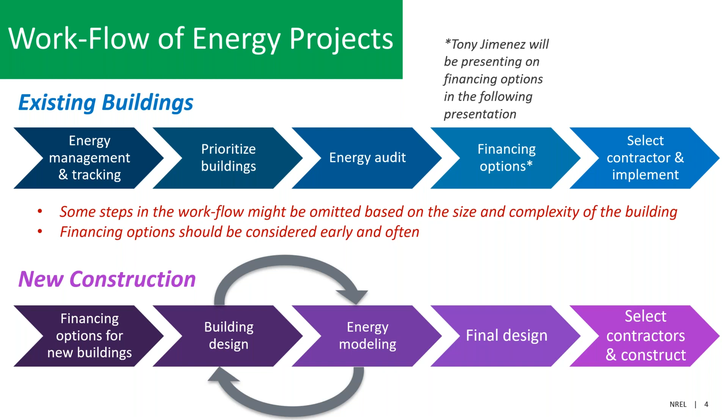So, existing building workflows. This is just the same flow diagram, but the three things I'll talk about in the upcoming slides for existing buildings for energy projects are the energy management tracking, prioritizing the buildings, and doing the energy audit. And then, as I mentioned, Tony will talk about financing options in the third section. So, next slide.

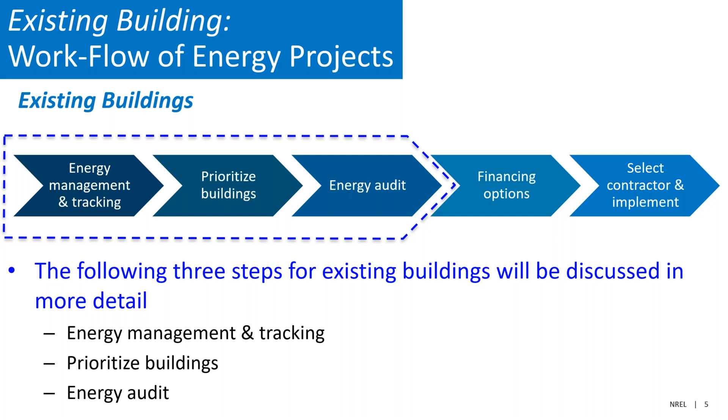So the financing option, or the energy management step. Sorry, I'm trying to get rid of the toolbar. I can't see the whole slide with GoToWebinar, but I'll just deal with it.

So the energy management step is, again, looking at your utility bills for the building and figuring out how it compares to existing buildings. So you can track throughout the different months. In certain climates, electricity use will be higher in the summer because you have air conditioning. Your natural gas use will be higher in the winter because you have space heating, things like that. So you want to track things over time, typically on a monthly basis, and see what your energy use is. Are there certain months that are anomalies where it's much higher than others?

And then you could go to this CBECS Database, which I have a whole other slide on, to benchmark how you're doing compared to other buildings of a similar type. So if you were looking at an office building, you'd go to the CBECS Database and look at, all right, what's an office building's energy use on a per square foot basis? How is mine tracking compared to that? Is it higher? Is it lower? If it's much higher, it might be a good indicator that there are opportunities to save energy in the building.

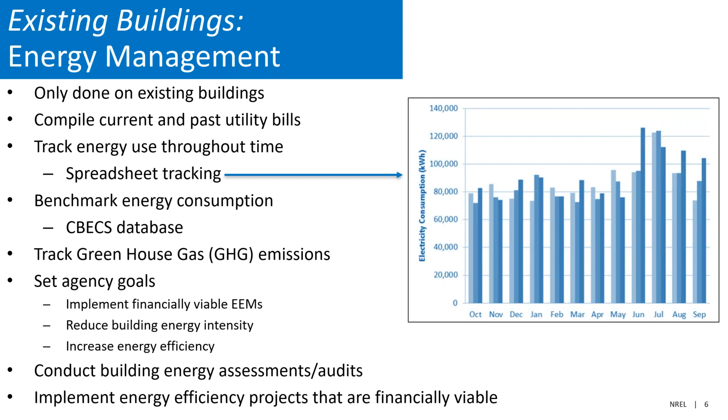You could track greenhouse gas emissions. The energy management also lets you, as tribes, set energy goals. You might want to, say, implement a certain number of energy efficiency measures, things like that. And then it lets you inform the next steps of, all right, what buildings should we do energy audits on, and what projects might be financially viable. So, next slide.

So the CBECS Database. Again, this is a great database to use to compare your actual utility bills to similar building types in the U.S. And it gives you an idea of what.

Sorry, I'm trying to make it so I could see the slide. Oh, okay, I finally figured it out.

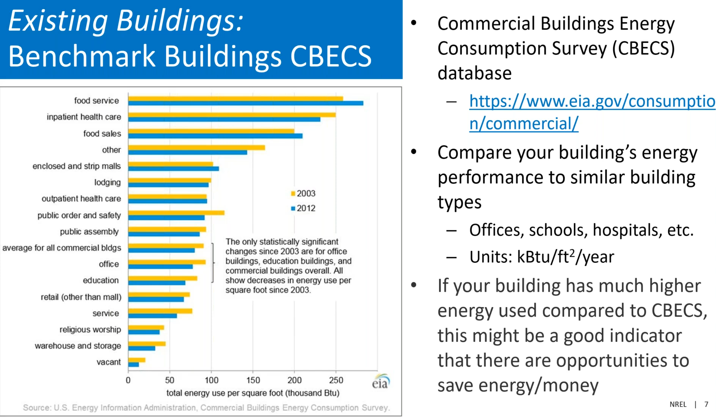So the link there is for the CBECS database. You could search under the different types of buildings. The chart on the left shows you different types of buildings: food service, lodging, office building, school building. You use these numbers; they're in an energy use intensity unit, so it's energy per square foot of the building. So you'd have to use the same units for your building and then compare how well it matches. Is it higher or lower? Again, if it's higher, it might be a good indicator that you can do energy projects to save energy and money at your building. So that's just one tool. Next slide.

So the next step would be to prioritize the buildings. If you have 10, 20, or 30 buildings in your portfolio and you track all those different energy uses, you typically can't work on all the buildings at once, so you have to prioritize which ones have the greatest opportunity to save energy. Once you have that information from the energy management step, you could set up your thinking on prioritizing which buildings to do energy projects in first.

Again, a lot of it involves gathering the monthly data, tracking the electricity, natural gas, fuel oil, whatever energy use you have, and trying to identify the patterns. Is it much higher compared to CBECS, or even compared to other buildings in your tribe? Is one building using much more? Are there seasonal fluctuations, things like that? And then, again, prioritize the buildings. Things you might want to consider, the last bullet item, are the age and schedule. Buildings that are older typically have more opportunities for retrofits. They might have a lot of older equipment that's inefficient.

And then the schedule, a lot of times you'll want to look at buildings that are used a lot. So if you have a building that's only used once a month, where you go in and have meetings and turn the lights on, but otherwise it's not in use, typically that's not going to be a great candidate, just because it's not using a lot of energy to begin with. So those are some things to look at. Next slide.

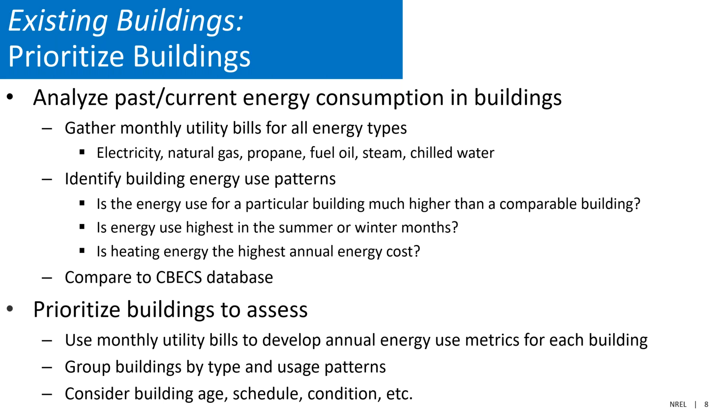And so that would let you go to the CBECS database and compare how you're doing. And then it also lets you compare your buildings in your portfolio on an even basis, because you're doing it on a per square foot basis. The third step would be to group the buildings by type and usage pattern. So maybe you put all the office buildings into one category, and then all the school buildings into another, and look at the different patterns and see if any of the buildings stick out as being high energy users, which might be good candidates for energy audits and energy projects.

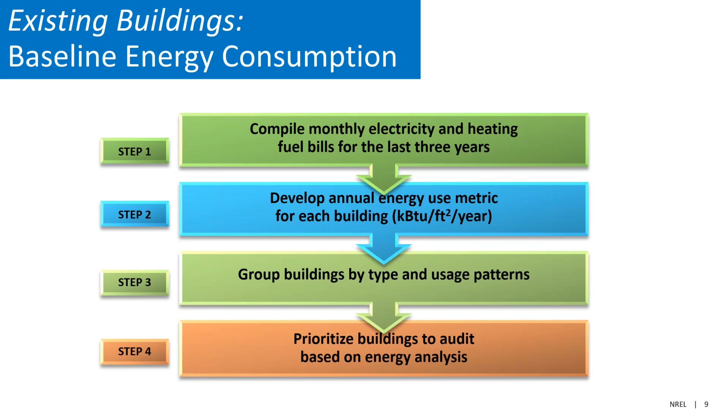The fourth step, again, is prioritizing those buildings on the usage pattern. So prioritize to see where you want to spend the effort to do the energy projects. Next slide.

You have three steps typically: the pre-audit phase, the audit itself, where you actually go to the building, and then the post-audit activities. Within the pre-audit, a lot of that energy management information is gathered. So this is where you gather the energy data and study the trends. A lot of times, bigger buildings might have control systems, so you could look at the trends before going into the building. So pre-audit is all the tasks done before you actually go to the building.

The audit is actually going to the building and collecting as much information as you can about the building. And a big step of the audit phase is also talking to the operators of the building, or the people who work in the building, to see what might be problem issues. They work in the building on a daily basis, so they know the building better than the auditor might. So a lot of times it's a collaboration to identify potential ways to save energy within that building.

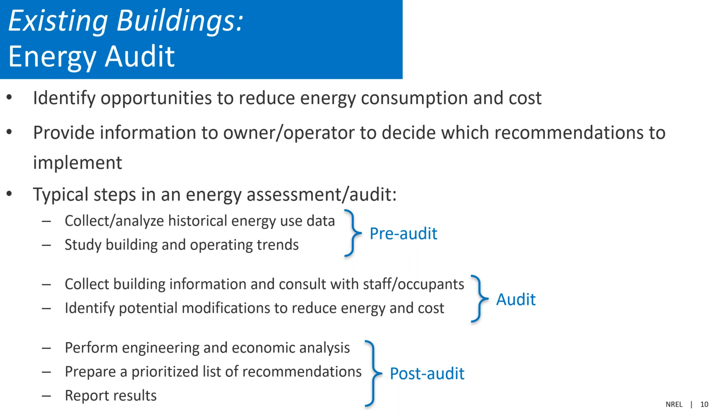Level 1, a lot of times you hear it called a walkthrough audit. It's usually done within a few hours. If it's a big building, maybe it takes a full day, but a lot of it is walking through, counting lights or seeing what kind of lights there are, seeing measures that are easy to implement and calculate. Lighting is an easy measure that's usually looked at in walkthrough audits. Maybe they're looking at motors too. Scheduling is a big one, like are they turning the lights off when they leave for the day? Those are usually things captured in the level 1 audit.

The level 2 audit is definitely a lot more detailed, so in a big building you might be spending multiple days. You'd be looking more at the heating, ventilation, and air conditioning systems. And a lot of times level 2 would involve creating an energy model for the building to see what the energy savings impacts are.

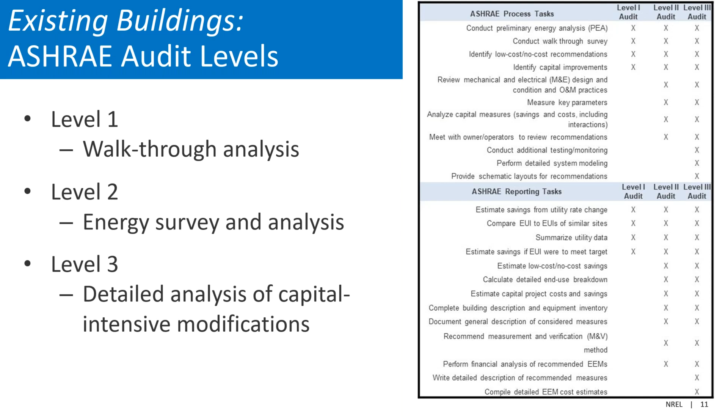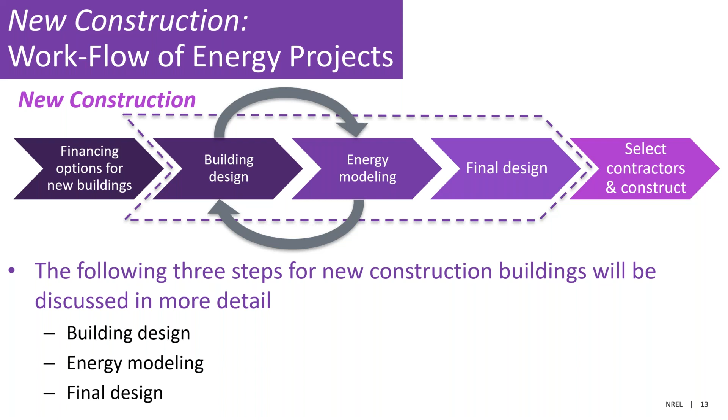Good, next slide. So the three steps within the building design. A lot of times when you hire an architecture firm, they're coming up with the building design, and they start out with basic things like: what is the building going to be used for? How big does it need to be? What is the site? How do we want to orient the building? What's going to be the flow of traffic and people to the building? What's the drainage on the site going to be? Pretty basic things are being looked at in the schematic design.

Then you work through the second level, the design development phase, where the architecture firm and engineers are starting to put in what types of lighting, what kind of wall insulation, are the walls going to be concrete or wood stud or steel stud, what kind of HVAC system is going to be put into the building. So in the design development phase, the building's definitely starting to become designed and everything's getting fleshed out. The schematic design process can be iterative, so you work through different design options and come up with the best design. A lot of that is related to energy modeling, which we'll talk about next.

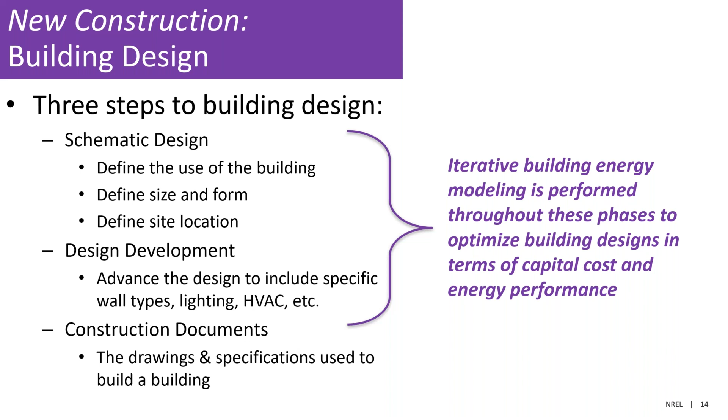And then the final thing produced within building design is the construction documents, and these are basically the drawings and specifications that are used to build the actual building. So it's what's actually being built. So next slide.

So for residential buildings, some residential energy modeling tools that you can use, or if you have consultants, they might use BEopt, which is the Building Energy Optimization Tool. It's a free download. There's the link for it. There's also AkWarm, which is a residential and commercial energy modeling tool. It's again a free download. That's more specific to Alaska, the cold climate zone, but it is a great tool for energy modeling in houses.

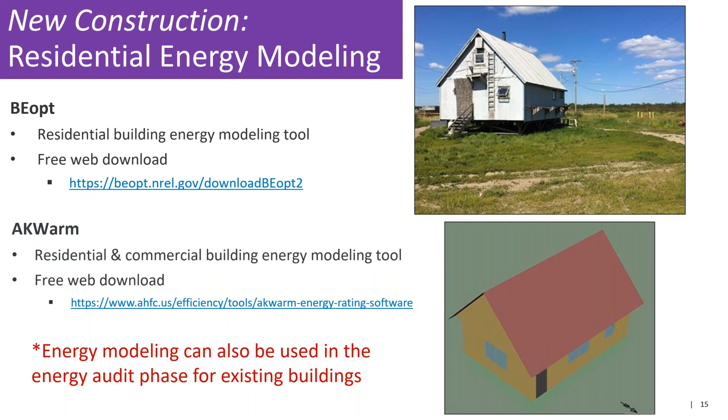So the images on the right are an image of a house in Alaska, actually, that we modeled in BEopt, which is the lower image on the right there. So next slide.

So some of the commercial energy modeling tools, and again, this isn't an exhaustive list. It's some common energy modeling tools available. Again, commercial tools can be used in existing buildings just like the residential tools. So the first one's EnergyPlus, the second one's eQuest, and the last one is again AkWarm, which is specific to Alaska's cold climate. So all free downloads, all work well for commercial buildings.

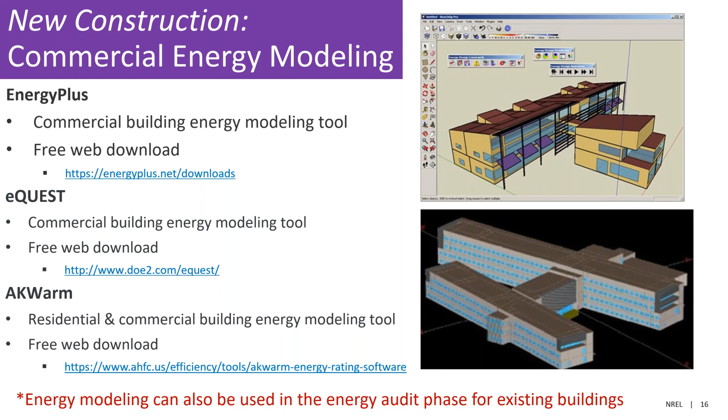And these tools, I should mention, are usually used by people who do energy work on a daily basis, the people doing the energy audits and things like that. But it's good to have a foundation of what's involved if your tribe is considering designing a new building. You might want to make sure when you pick a design firm or architecture firm that they do have somebody on staff who can do the energy modeling, so that throughout the design process they're analyzing all the options and coming up with the best design. Next slide.

So throughout the design process, the goal is to come up with the final design, those construction documents. So here's some of the concepts that we talked about during the last webinar, the good design elements to think about within new construction, and these also apply to existing buildings a lot of times. Passive building design. So again, looking at the building orientation, taking advantage of solar gains during the winter, but blocking them out with overhangs in the summer, using operable windows to provide natural ventilation when the conditions are comfortable outside, and then using thermal mass so that the sun heats up that mass during the day, but then releases it throughout the night.

The efficient envelope is using high levels of continuous roof and wall insulation, high performance windows and doors, air sealing everything. Using efficient lighting, so a big one there again is LED lighting, maybe using occupancy sensors. For efficient plug loads, the big one is going to be using Energy Star appliances and office equipment, things like computers, refrigerators. Pretty much most things with a plug can be Energy Star, and it's good to purchase those.

And then the last item, which is usually the most complicated, is having an efficient heating, ventilation, and air conditioning system. So big ones there, just picking the most efficient units, installing programmable thermostats. For bigger buildings, have control systems to do the scheduling, using premium efficiency motors and variable frequency drives. Next slide.

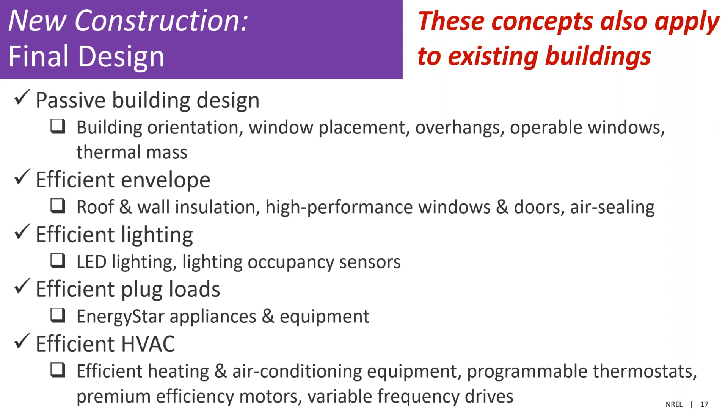So the next few slides are some tips on selecting a contractor. So the first one is always get several quotes, and make your decision not necessarily on who's the lowest cost vendor or contractor. You want to make sure that it's the best value that you're getting for the tribe. Make sure the contractor's licensed and insured, which kind of shows that they're well established and accountable. Check their credentials, so make sure they're a certified energy professional. We'll talk about certain ones on the following slides.

And then a key one also is the last item. Make sure they're local. This kind of shows that the contractor understands the climate that they're working in. And you could also check to see what other projects the contractor has done and see if their work was good. Do you trust them? Is the owner of that building happy with their work? Were they on time? Were they on budget? Things like that. So next slide.

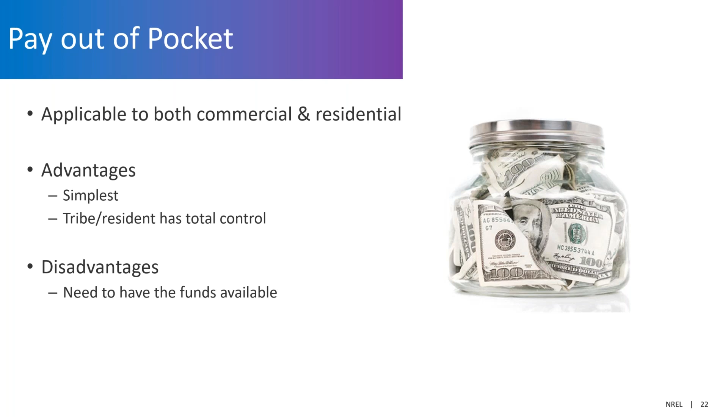To give a simple hypothetical example, before the project, you're paying $100 a month in energy costs. After the project, you're paying maybe $70 a month, plus 15 for the loan, and you're saving $15 a month. After you pay off the loan, you save $30 a month.

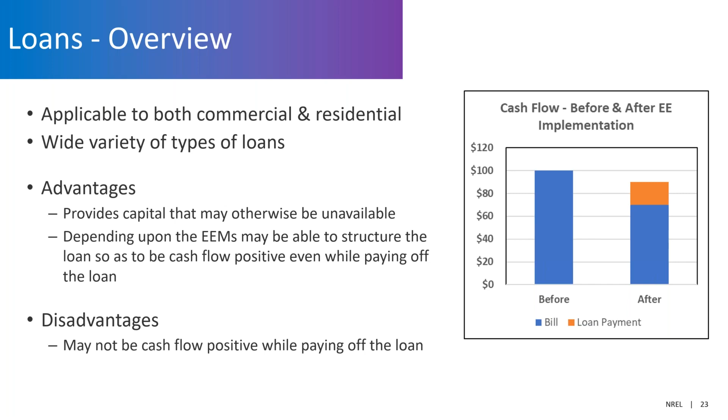So just to give an example. Disadvantage, you may not be cash flow positive if you're paying the loan off too soon, or it's a big chunk of the project. But the idea is to try to be cash flow positive on retrofits. Next slide.

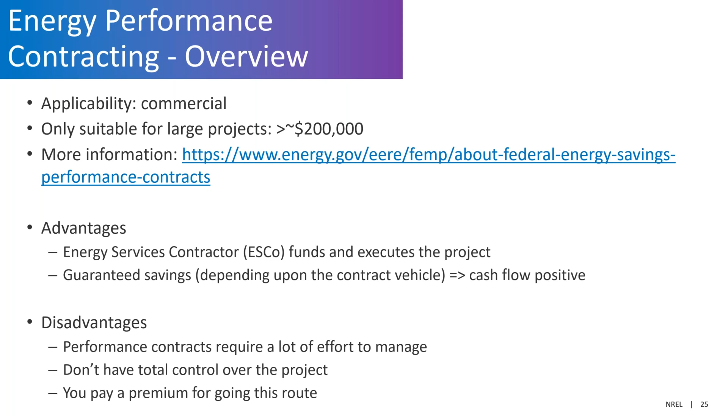And you pay a premium for going this route, since the ESCO has to guarantee savings. There's a lot of management verification. They're going to take a bigger chunk of the savings than if you pay out of pocket or can get a low interest loan. But if you've got a lot of stuff that needs to be done and it adds up to a lot, and you just want somebody to do it, this may be the route for you, because you can do it all in one package. Okay, next slide.

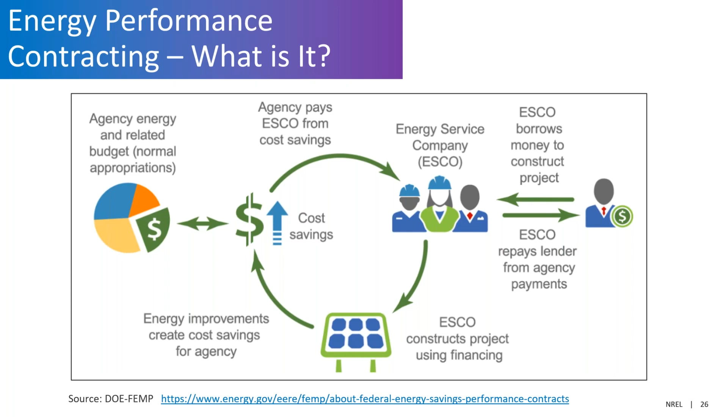And so just to give you a sense of what's available on the federal side, there's kind of three buckets. One is the energy savings performance contract. This offers guaranteed savings. Any energy conservation measure is good to go. Minimum project size about $2 million, and I'm not sure whether that's just a practical limit or if it's written in the regulations. And the way it works is basically DOE FEMP has a master contract, and you just do a task order under that contract. So they have pre-vetted vendors and all that good stuff. So you just kind of follow the process.

For kind of simpler packages, there's what's called ESPC ENABLE. It offers guaranteed savings, a streamlined process, so less bureaucratic red tape and brain damage, but you only have specific energy conservation measures. Same thing as an energy efficiency measure. There's no real minimum size in the regulations, but in practice, you probably need at least $200,000 worth of investment to make this work. And this is under a GSA area-wide agreement that, again, you just tee off of that, and they have pre-selected vendors and all that good stuff.

The other item is called a Utility Energy Services Contract, a UESC, and this is with the utility, and it doesn't have to be with your utility. It could be any, although it's usually easiest to do with yours if they do this. The regulations are a little bit different. For example, the utility doesn't have to guarantee savings, so you're going to have to really crunch the numbers and see if it makes sense for you. I don't know if there's a minimum project size by regulation, but again, it needs to be a large enough investment to justify the brain damage of going through it. And again, there are various GSA area-wides with various utilities that do this.

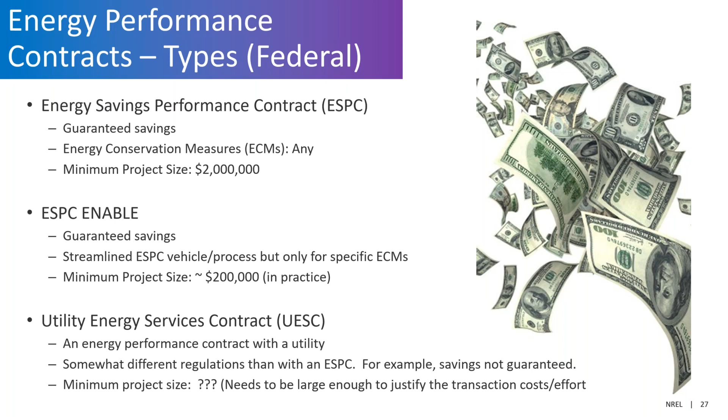All right, everybody's favorite category, free money. And by this I include grants, rebates, and tax deductions, tax credits for implementing stuff. Applicable all over the board. Most utilities, even the most conservative rural electric co-op, has some sort of rebate program to encourage energy efficiency. I mean, it may be as small as a small rebate for energy efficiency appliances, but even the co-ops, and I've been on a lot of websites, a lot of different utilities have larger programs than you might think. So you certainly want to check out their websites and see what they offer.

Some grant vehicles like tax credit financing are pretty complicated, and so you need to really know what you're doing on that. There's grant reporting and other requirements that add to the red tape. The grant timeline may not mesh with the project timeline, so you might have to adjust the project to meet the grant timeline. And if you are taking a tax deduction or tax credit on a project, you need to have the appropriate tax liability. But again, for a lot of projects, you may need some grant money to make it feasible and pencil out.

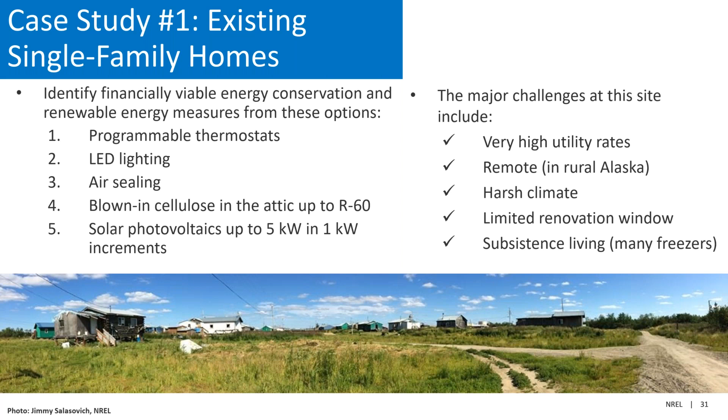So for this analysis, we used BEopt. This is one of the residential tools that was discussed. It's used to model single-family homes or multi-family residences. What it does is it finds the optimal cost by running through all the different scenarios that you can look at. So you could tell BEopt to look at implementing LED lights, different types of heating systems, so you might specify a furnace or a boiler, different levels of insulation,

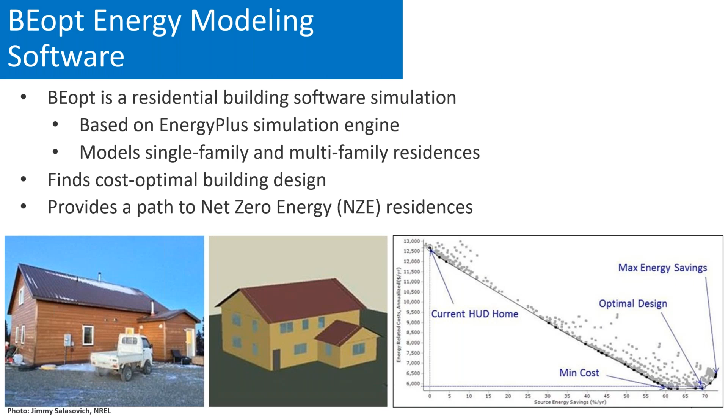So here's just an example home of the village that we looked at in Alaska. So with this, we did a quick walkthrough audit. So this would be an ASHRAE level 1 audit. So we looked at things like lighting, whether or not they had a programmable thermostat, what their set points were in the home during the day, maybe when they weren't at home and they were working, what they set the thermostat to, what it was at night when they were there.

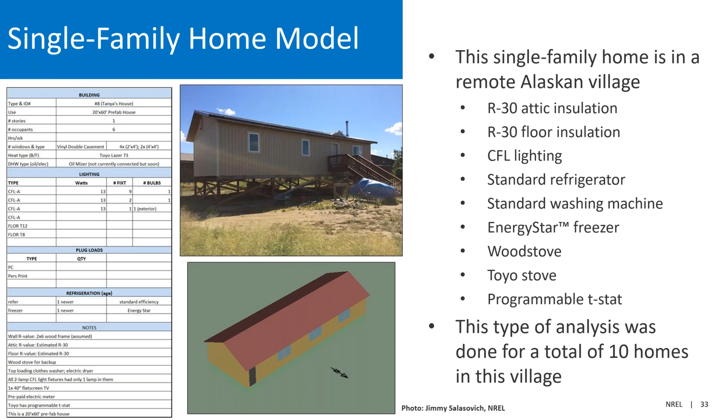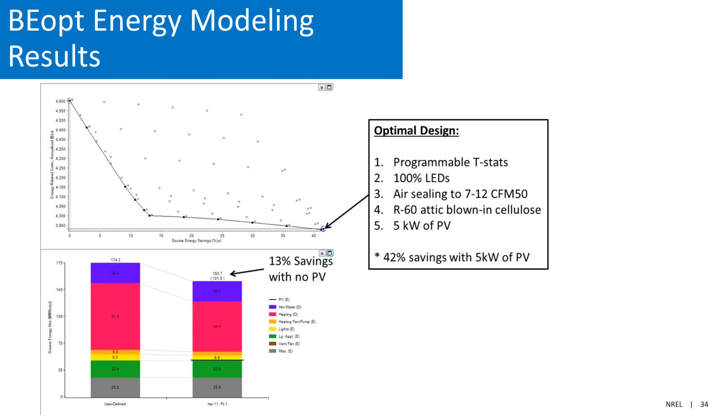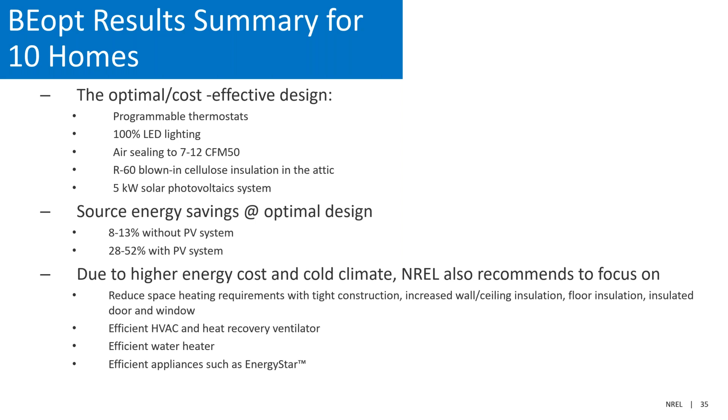Because of the cold climate, we also recommended reducing space heating by constructing any new buildings with tight construction, windows, doors. Looking at heat recovery ventilators for the heating units, efficient water heaters, and using Energy Star appliances, especially for the freezers that they had. Next slide.

So the second case study is for a new construction project. It was a multifamily housing unit for one of the tribes in Maine. So the big challenge they were having is they wanted to know what the most cost-effective heating, ventilation, and air conditioning system would be for this new building. So they wanted an energy model created; it was a senior housing unit.

And when we talked about the design process, they already had drawings. So they probably were in the design development phase, that middle phase. So they already knew how big the building was going to be, where it was going to be located, what the orientation was going to be, how many levels, those kinds of things. And so they wanted to know, again, what was their best heating system for this cold climate in Maine. So we looked at 3 different heating systems for the senior housing.

So the first one was a boiler unit with radiant floors. So it used fuel oil. The next one was a fuel oil furnace; all the systems also had air conditioning included for the senior home. And then the third option was looking at an air source heat pump for doing all the heating and cooling.

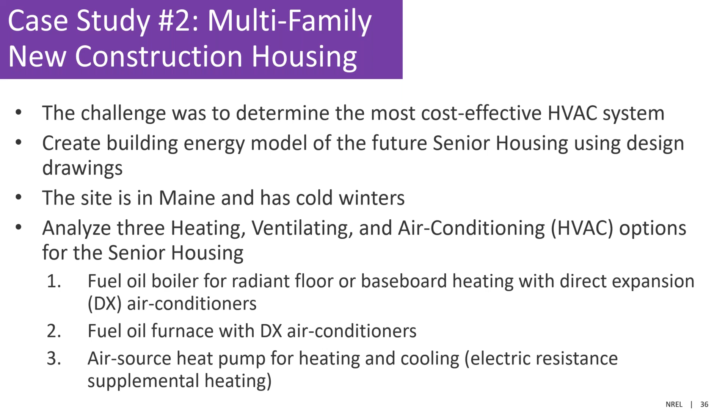So we built this energy model in eQuest. So again, it was one of the tools. The other options would have been EnergyPlus. If this was in Alaska, we could have used AkWarm. So we created the model. It was 24,000 square feet, 2 floors, 24 units.

There was a commercial kitchen for a communal space, and some of the specifications for the design: it had R30 walls, R50 roof, and very good windows. That U value is basically the inverse of the R value, so very good windows. Next slide.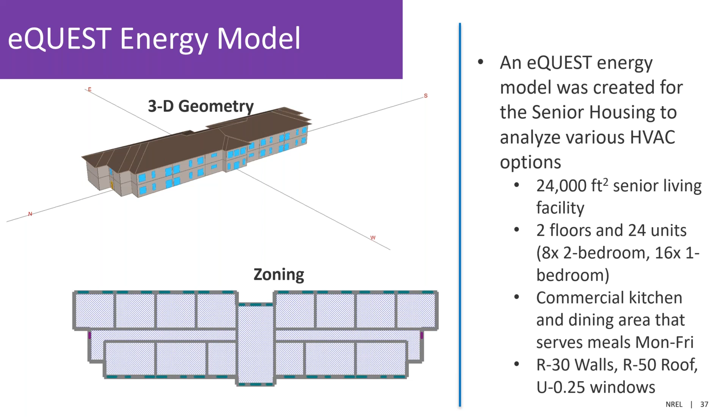So originally we were tasked to look at only the different HVAC options, but since we were looking at the drawings to set up the energy model, we went ahead and did a design review just to make sure: were they putting in adequate levels of insulation? Was the lighting system good? Things like that. So we looked at all the design drawings from the architect and engineers.

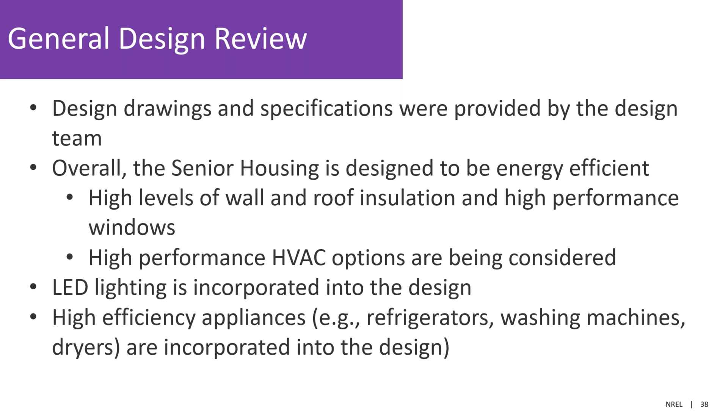Determined it was a really high performance building that was being designed. They had good levels of insulation in the walls and the roof, and they were considering higher performance HVAC systems. LEDs were used in the entire design, so that was good to see, and they were using high efficiency appliances, so things like refrigerators, washing machines. These were all incorporated into the design. So we confirmed that, and then went on to looking at the HVAC units. So next slide.

So here's the comparison of the HVAC units. So this is a summary. So the first column is the first thing we looked at, which is the boiler with the fuel oil and then air conditioning unit. The middle column is the furnace with the air conditioning unit. So again, that uses fuel oil. And then the last column is the air source heat pump, which uses all electricity.

So within this, we used the electric rates that they were paying. So 18 cents per kilowatt hour, which is pretty high. If you're looking at the nation as a whole, it's higher than average. And then we also used the fuel oil rate of $2.75 a gallon.

So the other thing is, the design team had to consider first costs when analyzing the trade-offs for the HVAC options. They had to stay within budget of the building design. So that was one of the key requirements. So they wanted us to look at what the installed costs were. So with these three options, I kind of highlighted some of the major findings.

So the lowest energy cost system was the boiler unit. The first unit, which is kind of a standard system that uses fuel oil for heating, electricity for cooling. The lowest energy use system was the air source heat pump system, so that had the lowest energy use.

And then you could see the total cost for heating and electricity for the boiler unit was around $58,000, $59,000, and then for the air source heat pump it was $62,000. So basically that's showing that higher electric rate is kind of penalizing, even though it has a lower energy use. The rate for electricity is higher than effectively the fuel oil rate, but it's pretty marginal as far as the energy costs throughout the year.

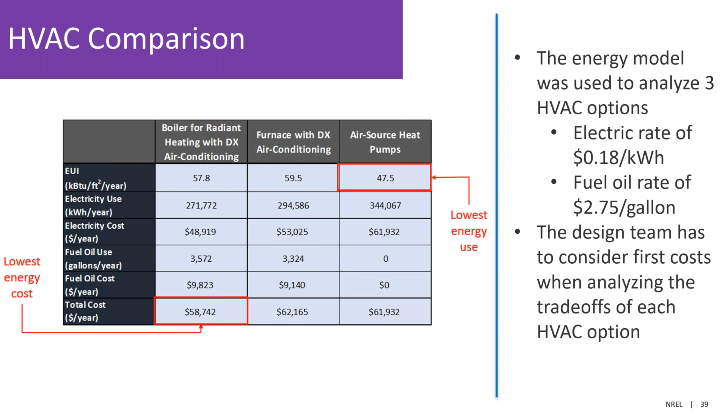And that's one thing I should note, that the total costs aren't the cost for the system. The design engineers were working on that, so they provided that information as far as how much the first cost of the system would be. I was tasked with more like what would the energy cost be on a yearly basis to pay for the fuel to heat the building and cool the building. So those were the big results from this new construction project case study. Next slide.

So the final section is just the summary, and there's only one summary slide. It's the same flow chart that you've seen a few times now. Again, the top in blue is existing buildings, and the bottom in purple is new construction projects. For the existing buildings, again, you want to track your energy use, prioritize, and then based on your building prioritization, do an energy audit.

So collect all the data, perform the audit, and then look at financing options. Again, you're probably going to be looking at financing options first thing too. As Tony mentioned, ESPCs, third-party financing, direct purchase, grants, things like that. And then the final step is selecting a contractor. The summary there, similar for new construction, is get multiple quotes, get a licensed and insured professional, make sure they're certified, and make sure they're local.

For new construction, you want to determine the financing options to pay for the new building, and determine whether it's going to be an office building, rec center, health center, or things like that. The building design is made up of those three design steps: the schematic design, design development, and then the construction documents to actually build the building. And the energy modeling section is, again, pretty iterative with the building design.

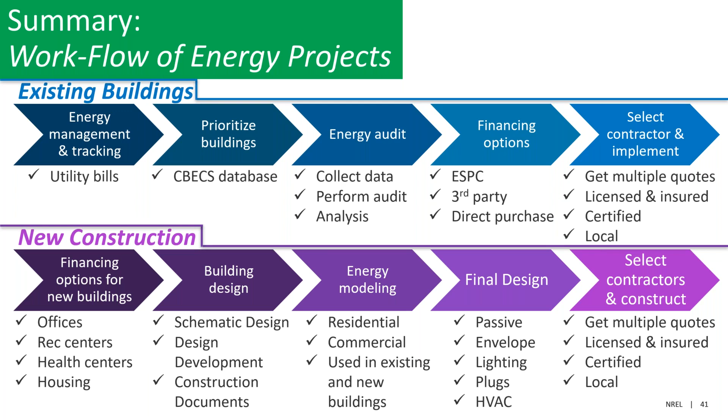And as I mentioned, selecting the contractor, similar things as we mentioned above: get multiple quotes, licensed and insured, certified, and local. So if you hit the next slide, that's the end of the presentation.

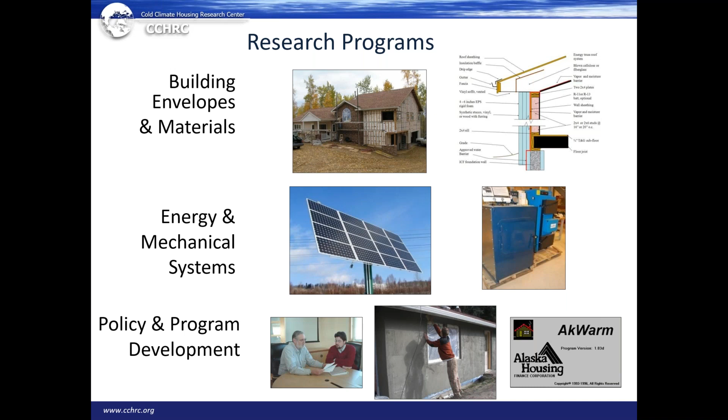And we work very closely with the state of Alaska and with the Canadians on the development of policies that drive energy efficiency and more healthy buildings. Next. We do consider very much that we are a part of a global community, the Arctic community primarily because we're in the north, but that we're all moving towards solutions, and we can do that much better together.

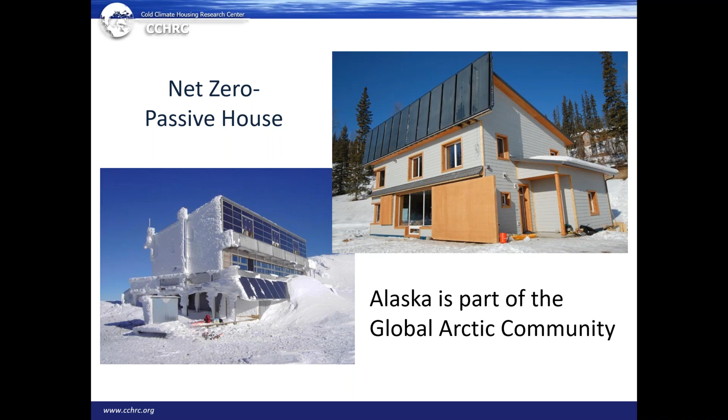This home you see here in Fairbanks on the right is a full passive house home built here with as many local materials as we could as a demonstration of what can be done. And this kind of effort is happening all over the world, of course, and in these times it's particularly critical that we address shelter in a broad and strong way to really find solutions for the challenges that we're facing. Next.

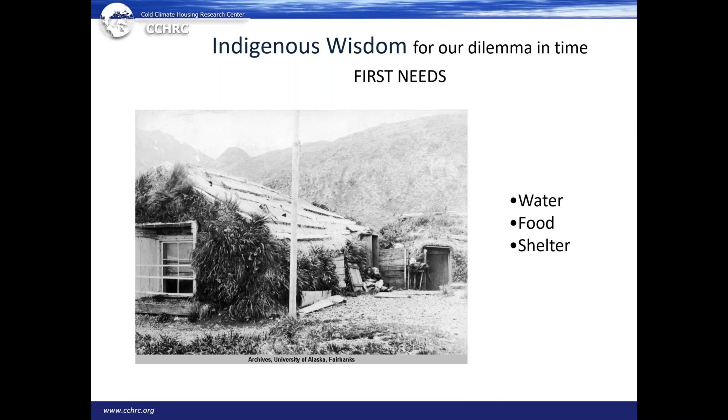This is really the basis of how we operate, and it really begins with what we call indigenous wisdom. And indigenous wisdom surrounds us here in Alaska. The elders and the folks that have lived a sustainable life for millennia are still a part of our world. And we need to remember these basic needs, and we base our work on those needs: water, food, and shelter. Next.

And from a European and a colonialist perspective, as I think most of you know out there, it's all about me. It's not about we. So we need to be looking at that. And this particular moment with this virus we're dealing with is certainly a time to reset that value and understand that we are a people, a global community. We are all human beings. Next.

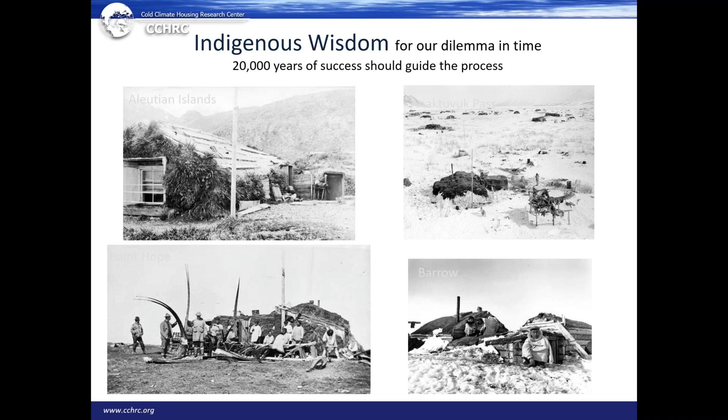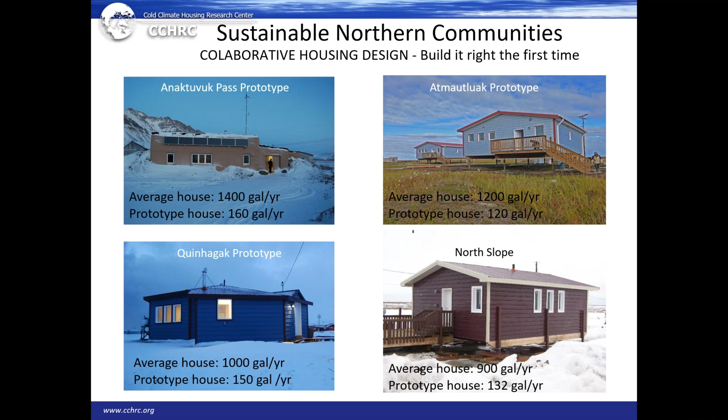It begins with listening. No one has asked the first people of the Western Hemisphere what their needs are and reflected those needs. In over 40 years of designing and building homes for clients in Alaska, I have never told them what they were going to live in. I ask and I listen. And that's the first approach, to have respect for the people that are living in those places. Those folks that are living in Indian country in the lower 48 know more about that place than those of us from outside ever will. So it's time to listen.

Listen to the form, listen to the needs, look at the climate, talk to the elders about the direction the wind blows and how the climate may be changing. There's a resource there that is not being listened to, and that needs to start happening. Next. Next, please.

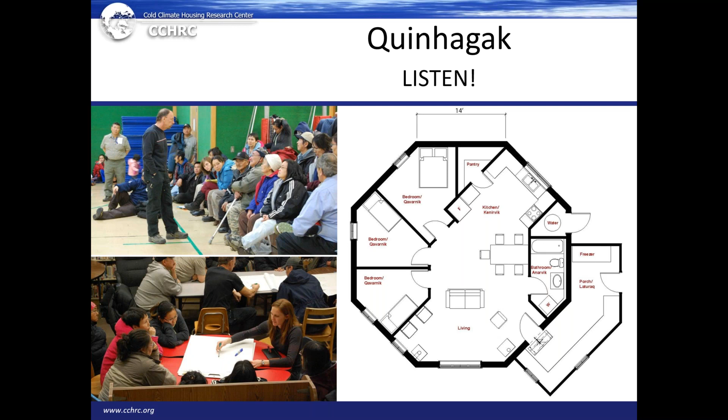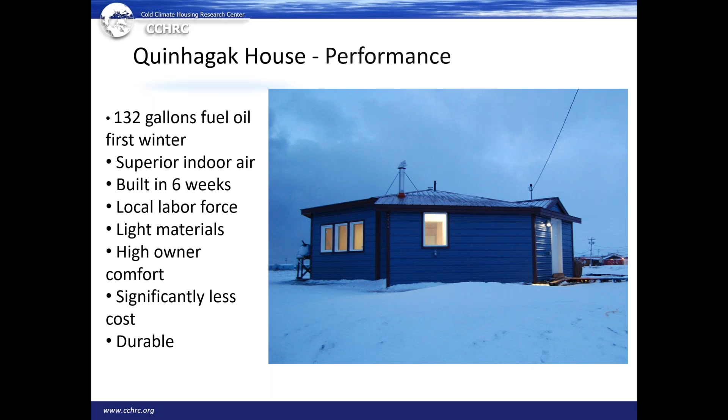That house that you saw in the last drawing, this is the kind of performance we're seeing from new construction, designing with the people: the reduction of energy use by 80 and 90% of what it was before, good indoor air quality, people involved in building their own homes, a sense of ownership from concept to walking through the front door. So that's new construction. Building it right the first time is the best thing we can do. But that's not the case for most of our housing. Next.

This is what we have now. So how do we work with what we have? While we look for ways to provide more appropriate new housing that's affordable, that's healthy, that's durable, that reflects the lifestyle of the people that are living in it, while we're doing that, we're going to have to deal with what we have. And what we have is a real mess. This picture is very typical of our rural Alaskan communities.

And it is a legacy that has been put on this generation from the colonization that has come to these places. People who had a healthy life, a very full and rich spiritual life, a deep community life, taking things from the land to create shelter in their home, in the place that they live, a balance, a respect. And that has been replaced by toxic buildings, high energy costs, and many, many changes. Now, some changes good and some not so good. Back to that analogy of the cave. I don't want to go back to living in a cave.

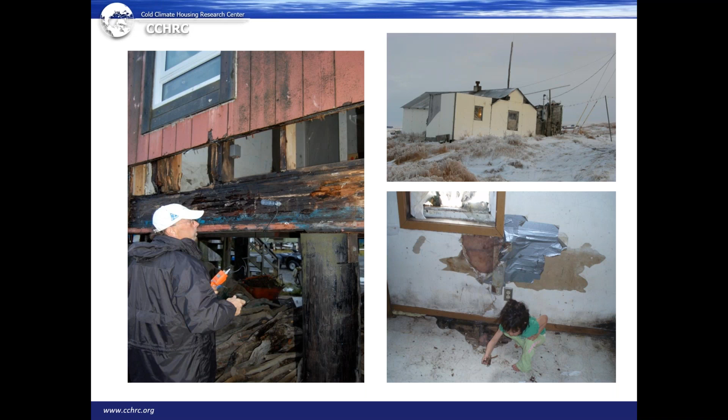So we have to think about, and this is something that's embedded in what we do here in the North, is this holistic approach. You can't separate the shelter from the people that are going to be in it, from the land, from the resources that are there. We have to look at it broadly. So a holistic approach is necessary in everything we do, whether it's just going in and doing some weatherization. It needs to be holistic and understanding with what that weatherization is going to do to the house.

We may think we're doing something good, but if we tighten the house up too much and think we're just focused at saving energy, it may be at the expense of the health of the people living in the house. And is this house really functioning as it was designed to? Or if it wasn't designed to function well, how can it be modified to do that? So we have to look at that. And again, the human element driving our decisions. What effect does what we do have to the people of the community, of the family, and of the individuals that are in these homes? Next.

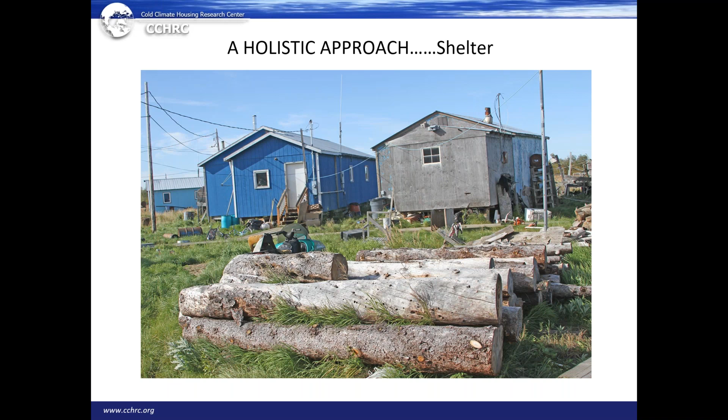So as I mentioned, Jimmy and Tony covered some great programs. In Alaska, we have our parochial programs. We had a wonderful program a few years ago that was a home energy rebate program. It was Alaska specific, but it gave rebates of up to $10,000 for retrofits. Unfortunately, it was mostly used in our urban areas, and in particular, an area that didn't have the stresses that our rural areas do. But it did very clearly provide a great benefit and a reduction of energy in those

homes. The weatherization program, however, reaches out into the highest needs regions of our state, and that affects the people that are under the greatest challenges of high energy costs, a severe environment, high transportation costs, and it again can be very effective if it's done correctly. Next.

The AkWarm program was mentioned by Jimmy and Tony, and it is very, very user-friendly. Those of you that live in Zone 4 and 5 in the northern tier, you should go ahead and download it and play with it a bit. It's just very intuitive. It really gives you a good idea of the kinds of things that you can do to a structure to improve its energy efficiency while also addressing the critical needs of ventilation. Next.

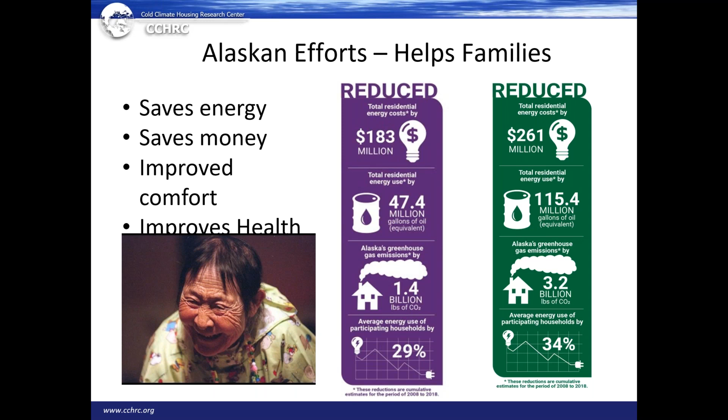Next. We're in a cold climate. 65% of the time, we've seen that people spend in their home, in their shelter. Indoor pollutants are harmful. High moisture is harmful. Overcrowding is harmful. These are all the challenges that we're having to address as we move forward here. The improvement is very, very clear.

On the energy efficiency side, almost 26,500 homes participated. They went from 2 to 4 star, meaning in our rating system, they used half the energy after the retrofit that they used before the retrofit. And on the weatherization side, the improved efficiency has done the same kind of thing to a broader number of people, particularly those that are in most need. And indoor air quality, once again, is part of that.

So it's a more intangible benefit to the people, and savings to the state of Alaska and the federal government. Next. Next, please.

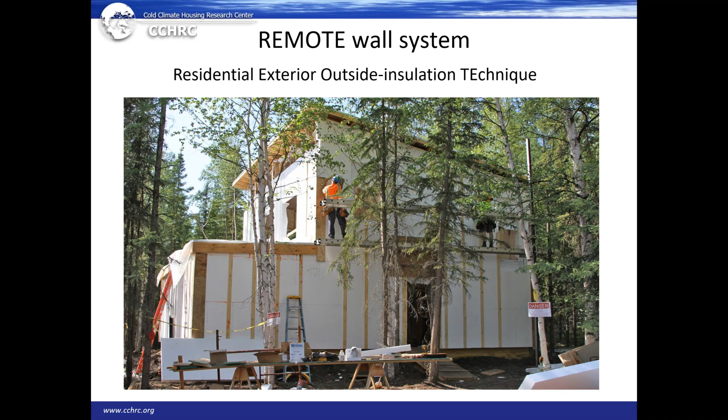The real piece of this is to bring the wall system that is vulnerable, the organic members of the wall in a wood frame structure, back into the conditioned space, so that in the case of the REMOTE wall system, the relative humidity and temperature of the organic members of the wall are the same as the furniture in the home. So there's no condensing events that occur in this wall.

The wall is able to dry toward the inside. Of course, it creates a very, very tight envelope, meaning you've got to ventilate and keep those moisture levels down, or your humidity levels will get very high.

But in the case of a properly applied REMOTE system, you do not get condensing in that wall because there's no cold surface in that wall for the condensing to occur. So you avoid the mold issues that are so endemic in Alaska. It doesn't require in new construction a vapor barrier at all, or rely on that interior vapor barrier in the wall system to protect the wall. The wall can breathe toward the inside.

Now, if you have a vapor barrier and you put an adequate amount of insulation on the exterior, you still don't have a problem because you don't get a condensing event in the wall. I'd encourage you, we have manuals and videos on our website to go and see that one. Next slide shows a little more.

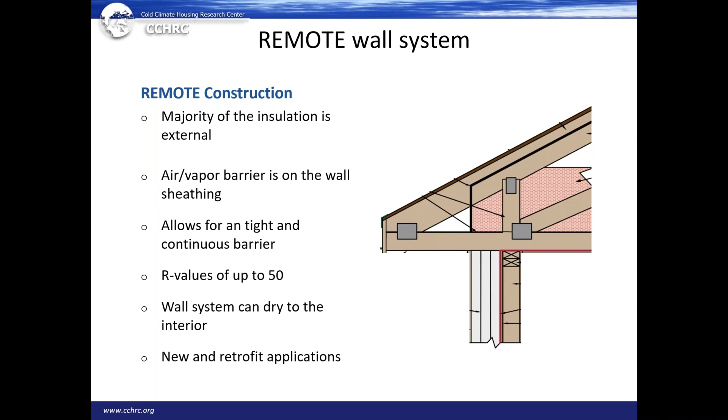So this is just kind of a cutaway view of how this system addresses thermal bridging. In new construction, it's wonderful because a lot of the detailing that has to go on with an interior vapor barrier and detailing on the rim joist to keep them warm and not have air infiltration is taken care of because you have this complete thermal envelope.

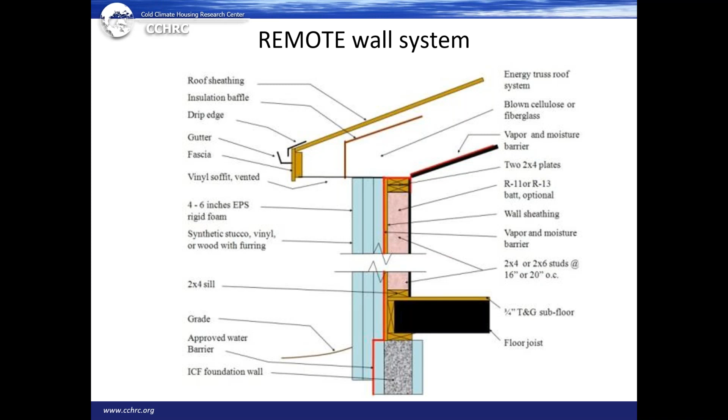Again, back to the analogy of the parka. If you've got a broken zipper or you've got a baffle or a tear in your parka, doesn't matter how thick the rest of the parka is, it's not going to be warm. So an emphasis on a complete thermal envelope is key. And along with that, understanding that you have got to ventilate that home. You have to do a ventilation strategy with any kind of tightening up of the house envelope. Next.

This again is just a detail of a foundation and how we approach it in new construction, but also on retrofits. If you're doing a deep retrofit of a home, this thermal bridging issue, and again, a holistic approach. Think about how that's going to affect the rest of the structure. No matter what you do to it, it's going to affect the rest of the structure, and it will affect folks that live in that structure.

So we've got to think through the implications of every step we make in a retrofit process or in a new construction process. That human element, how is it going to affect the humans that live in it over time? Next.

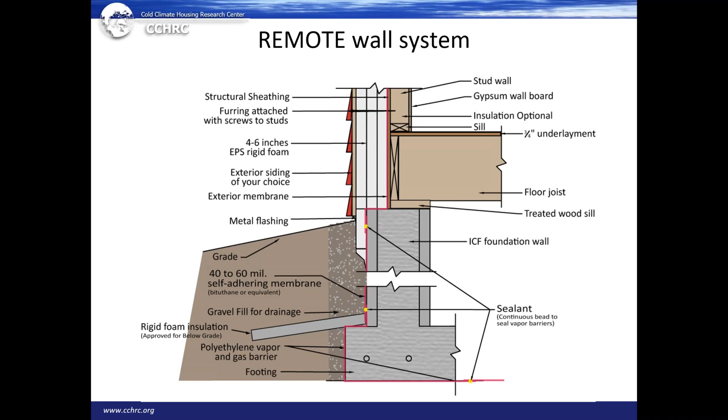So the benefits are clear of retrofits. You're reducing heat loss, you're reducing that condensation potential, you're not having the air leakage. And these retrofit homes will go from, at 50 pascals, 5 or 6 ACH, air changes per hour, to under 1. So it's a very, very tight envelope. And it keeps that air infiltration down.

Now we have to, again, I can't overemphasize ventilation. We talk about build tight, ventilate right in Alaska. And that is extremely important. Next.

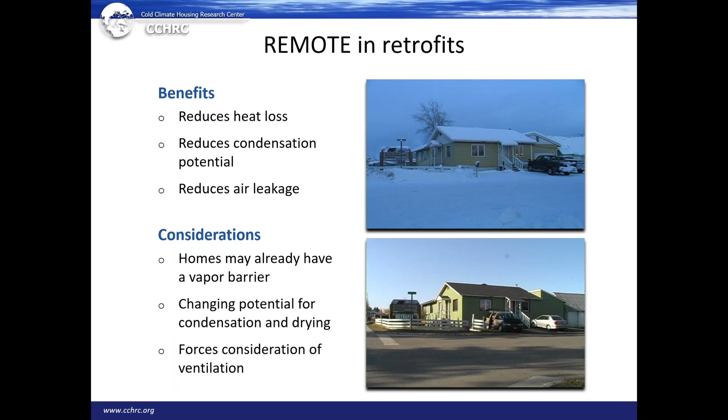But what really happens and what can we get away with when we're stressing the environment both outside and inside? We have a mobile test lab that we can move around the state. Originally, we put it in Southeast Alaska, which is an environment that is considered to have 0 drying degree days, to see what the best wall system might be for that region of Alaska, that wet, humid, cold region.

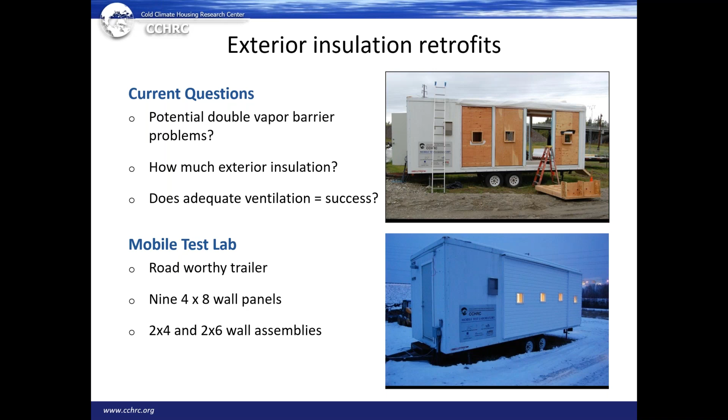We can test 9 different wall sections at a time in this mobile test lab to see what happens. What happens when you run the relative humidity up inside and put a positive pressure driving that moisture into the wall? What will it do? Again, those studies are available on our website, and you can go into some detail with that. And we're always happy to communicate and answer questions. Next.

So again, just some more detail. I know we're getting short of time. Different runs of 9 different wall sections and different issues related to those wall sections that we've run in our mobile test lab. Some very interesting results, and showing again and reinforcing the problems that we're seeing in rural and urban Alaska with a poor approach to building science on retrofits. Next.

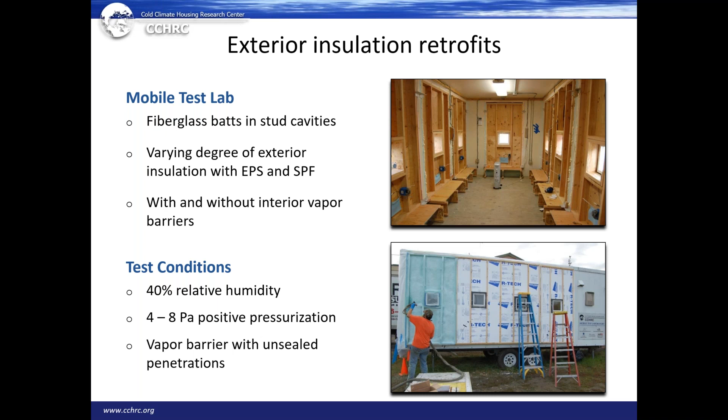The condensing events in those walls were catastrophic. Literally, the wall filled with ice in the wintertime. Now the wall couldn't dry either to the inside or the outside, because we created a double vapor barrier, with the Thermax being put over the structural sheathing on the outside, and on the inside you had a polyethylene vapor barrier.

So any water that got in there, whether it was from wind and rain or from a condensing event, simply couldn't dry. So the mold would start and the rot would start, and this is the condition of so much of our rural homes and urban homes. Next.

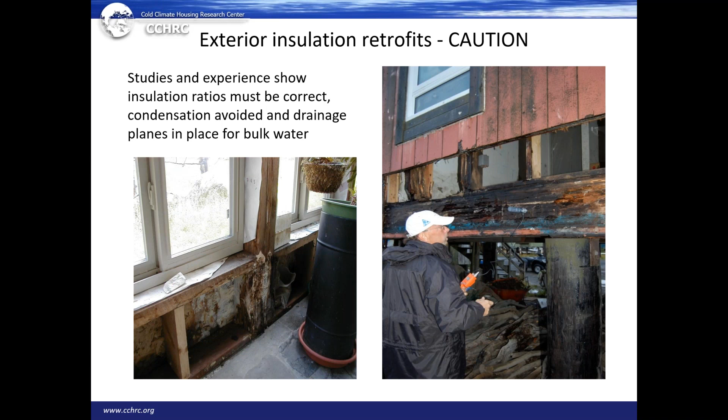But that's part of this philosophy of indigenous wisdom, the warm parka, and 21st century technologies. Let's make this parka out of materials that are going to give us a high R value, have all kinds of benefits to the people and the families living in those homes, and high performance. Next.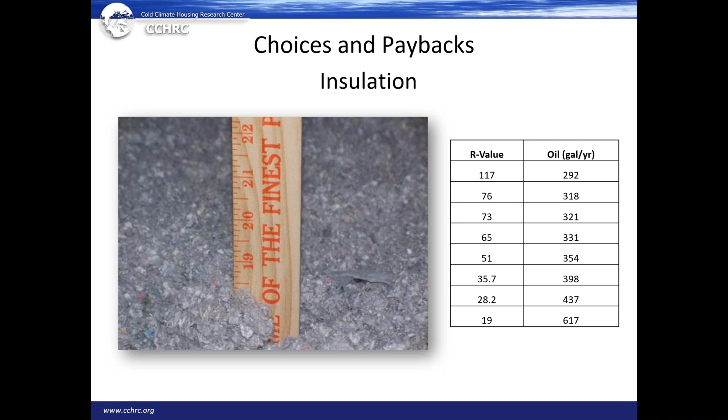Same thing with windows. In this case, 77 gallons of fuel for just adding a triple pane rather than a double pane. Up here, except in our areas with cheap energy like Anchorage, no one considers building a house without a triple pane window. And in fact, we have a quad pane as well. Now, what's the payback on the cost of a quad pane? You start to get into a little payback issues related to that, but triple's a no-brainer. Next.

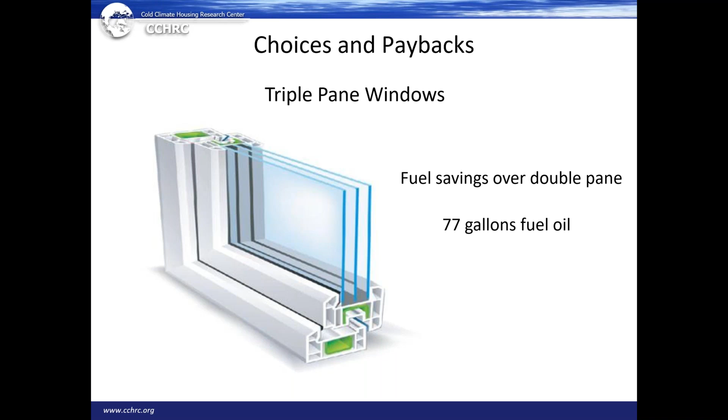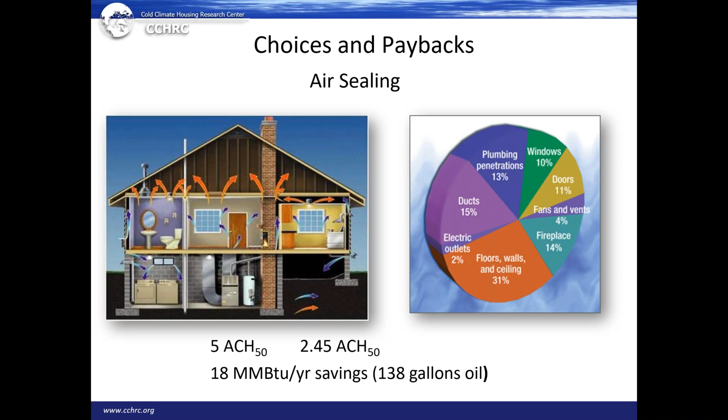And air sealing, of course, is the cheapest thing you can do. It doesn't cost much to buy a case of caulk. And if you can find where those air leaks are, air sealing is the first and lowest hanging fruit to reduce your energy costs. You need to watch that relative humidity in the house, though. You seal it up, you're going to start seeing humidity building in the house, and you're going to have to start thinking about how you're going to bring some fresh air in to make it healthy. Next.

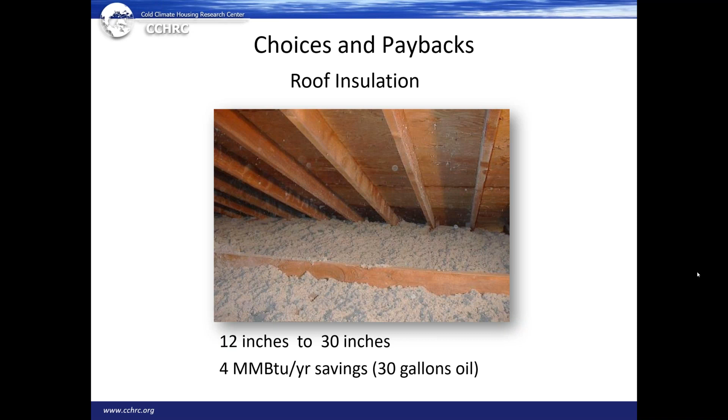Roof insulation, again, is a very, very easy thing to add to. That's low-hanging fruit. AkWarm will show you the lowest hanging fruit and the payback cost of adding just a little bit of this and a little bit of that, and how much time it'll take to get that payback. Next.

Heat recovery is a big piece of things here. Especially in any home that is larger than about 1,000 square feet, heat recovery ventilation is critical. You want to have that cold air getting preheated as it comes in and cleaned.

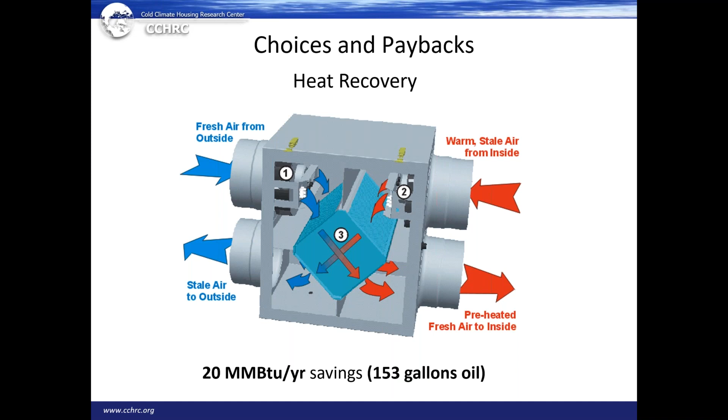Now the next slide, please. The next slide shows a system that incorporates, well, I'm sorry, it's the one after this, but we'll talk about this one first. So this is just looking back at hot water efficiency and the different things that you can do to save money and get paybacks quickly. So the choices and the paybacks: we need to look at what we do and how it improves the home itself and the home's performance, but also how quickly it can be paid back, because those are the arguments we can make for making these investments. Next.

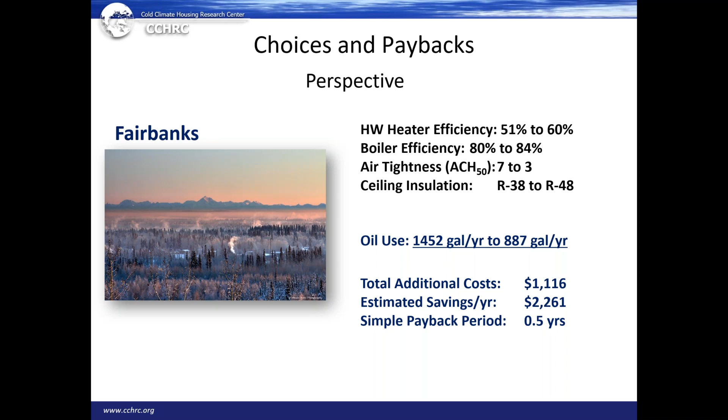This is part of the policy priorities. Now, we have done a housing needs assessment for the state of Alaska. We only have 600,000 people here, but almost 100,000 homes are cost burdened, meaning it costs a third of a family's income just to live in the house and keep a roof over their head. And that is primarily the cost of the mortgage, of course, but also energy use.

So if we can develop loans and policies so that the savings in energy from doing retrofits pays off in the savings on the mortgage itself and the cost of living in the house. So we've got a lot of challenges here, and we've looked regionally at how those challenges can be prioritized. Next slide.

The policy research team is looking broadly in Alaska at the energy cost savings for single family homes by region, and what energy efficiency can do and the economic driver that it can have for those regions by doing energy efficiency improvements on the housing stock that we have. Next slide.

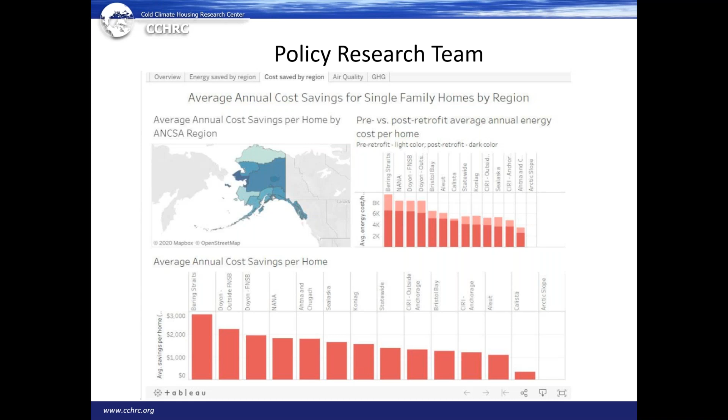Each region, this is Calista, the Yukon-Kuskokwim Delta region. We have some really nasty challenges in Alaska, again, on the holistic approach. Is it just energy use that's the problem? Not really. 40% of the houses are considered to be crowded, with 2 or more people per room. We see 800 square foot houses here that have 10 or 12 people living in them. So what does that do to the indoor air quality and the health of the folks living in those homes?

In this region, you can see a third of the homes don't have indoor plumbing. They're still using honey buckets. Again, the risk to the health and safety of those folks can be more of a priority than the cost of energy and retrofitting those homes. So we have to look at how everything relates to the other and decide what's the best approach for that community. The challenges are big, and the resources for addressing those challenges are finite. Next.

This is the Cook Inlet region, the region around Anchorage. Now, much better homes, not the problem with overcrowding. Lots of retrofits have been done in that area to reduce the cost of energy. But in tightening up those homes, doing those retrofits and lowering the cost of energy, what about the indoor air quality? And what about the ventilation to address that indoor air quality? So there's the problem in Cook Inlet. Next.

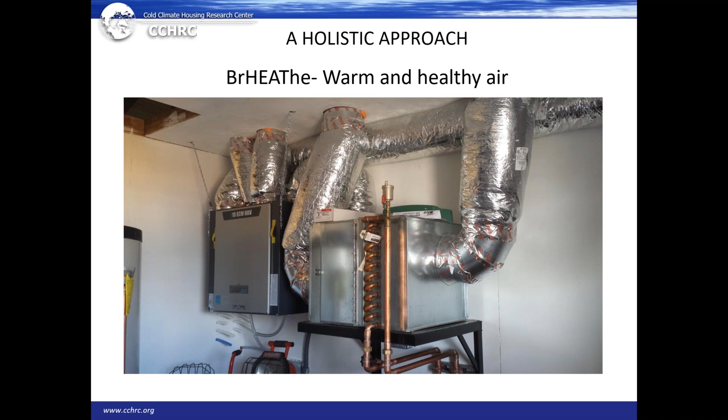That's why we call it Breathe. That's why we wrote it the way it is. So it's good air and it's heat. You can't have one without the other. Next slide shows a diagram of that.

So this is the system, and the system has been put all over the North Slope in our coldest region in the state, all over the West, here in Fairbanks. Our prototype homes, the biggest problem we had with our prototype new homes was finding a heating unit that was small enough. The early ones that we did could be heated with a long haul truck rig heater in an 18,000 heating degree environment, a 4-bedroom house. You still needed to ventilate, but you could heat that with a long haul truck rig heater.

So the issue was, what happens if they turn off the ventilation in a house like that? What happens is problems. In the case of the Breathe system, now it's all integrated together. So clean air, warm air, a comfortable, healthy environment. Next.

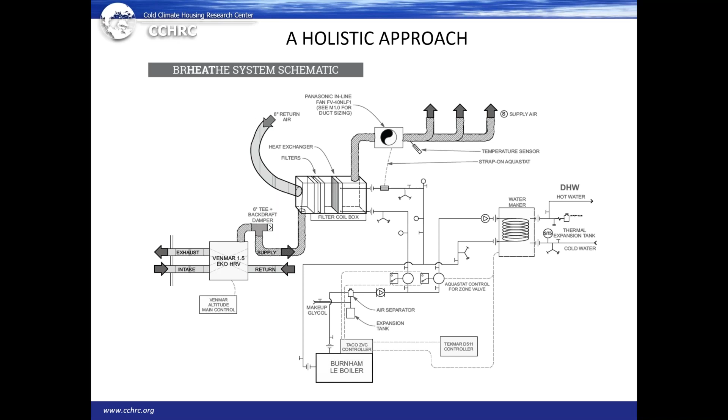Sanitation, we can't forget. This is another system we've worked on with Alaska Native Tribal Health Consortium and other partners. We call it PASS, Portable Alternative Sanitation System. This system is being put in those homes without bathrooms that have honey buckets. This is a huge sea change for them. You've got a drying toilet. It's called a separator, that separates the fluids from the solids. It dries the solids, so they're very benign.

You have a gray water system cistern that those fluids go into, as well as gray water for washing your hands. It's ventilated, so it creates ventilation for those houses as well. A constant ventilation, pulling air out of the house. And it has a water system that's delivered water that has a filtration system built into that delivered water system. So you can take the water out of the river and you can filter that water and have healthy, good water for washing hands and for cooking and for drinking. And at the same time, you're meeting the needs of wastewater and human waste. Next.

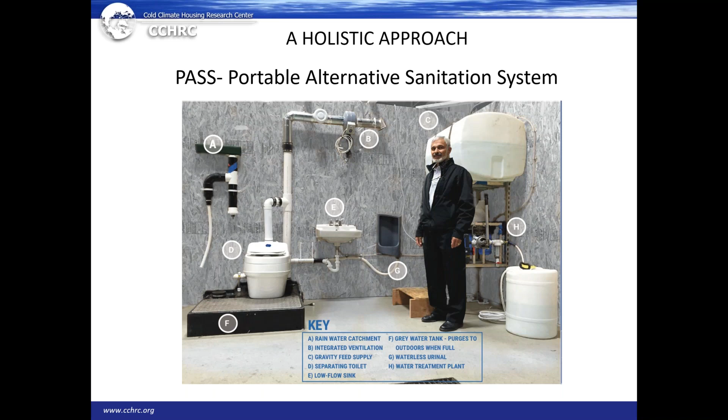So it really gets down to this. I mean, it really gets down to it. And I think this moment in time where we're dealing with this virus and understanding the commonality of our humanity, that we're all peoples of this earth, and that we have to have a healthy land for healthy people. And without a healthy land and healthy people and a healthy spirit and understanding that it's all connected, with the number of folks that are on the world now and the problems that we brought onto this planet, it's not a cheerful picture. Next. Next, please.